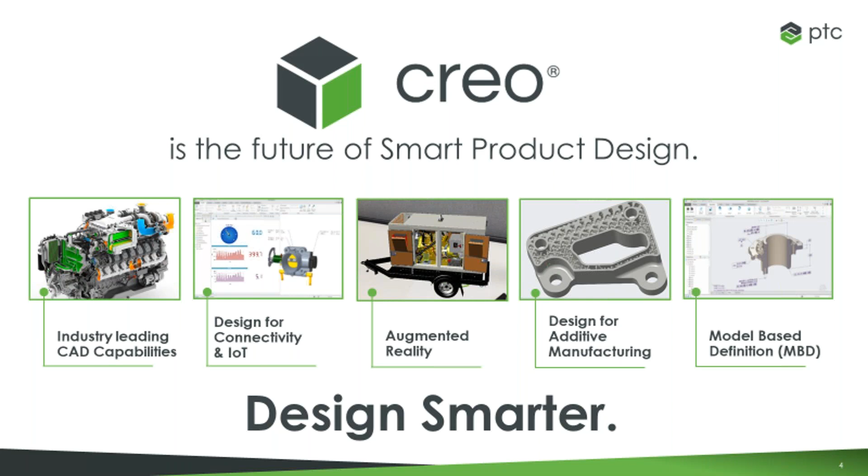In this webinar, we're going to go over a few things and some remarkable capabilities, and we can't wait to show you how it can prospectively help you as we explore more design iterations. So without further ado, let me introduce Eduardo Sorto.

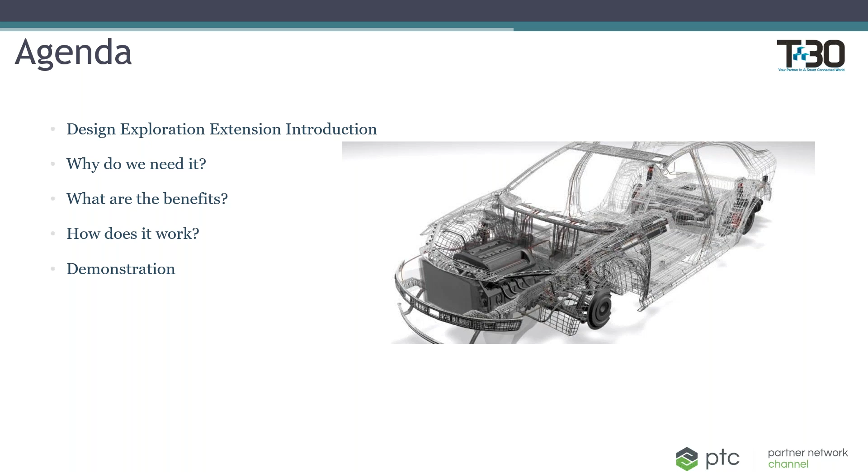The Design Exploration Extension is exactly what it sounds like. It enables you to try out new designs and explore different design alternatives. This is crucial early in the design phase when you're not exactly sure what the end product will be, but you know what your requirements are. From those requirements, there are a lot of different variables you can work with, so having an environment to test out those variables is crucial early on.

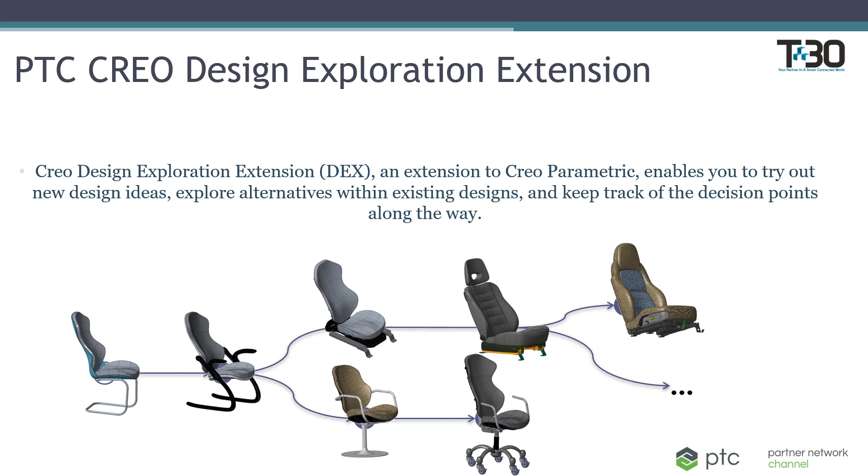The reason we're having this conversation today is because the Design Exploration Extension is now offered as part of the base subscription package. So if you've recently found yourself upgrading to a subscription license, you'll come to see that you have the Design Exploration Extension already embedded, and you can learn here how you can use it. Or if you're considering moving to a subscription model, hopefully you can find some value within this demonstration.

So why do we need, or why would we use, the Design Exploration Extension? As engineers, we know that design is an evolutionary process. There's an end goal we want to get to with the requirements, so we need to test out how components are going to fit together, what are the interferences, what's the market asking for. We need to test out not only the aesthetics of your product, but also the functionality.

This last point says that engineers don't have a blueprint to follow, so we need to test out these different design paths. Being able to use an environment that enables you to do this is crucial for your end result.

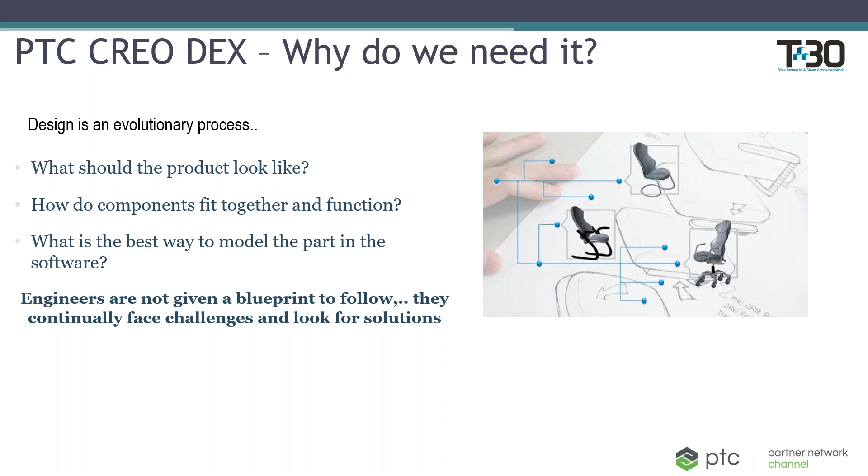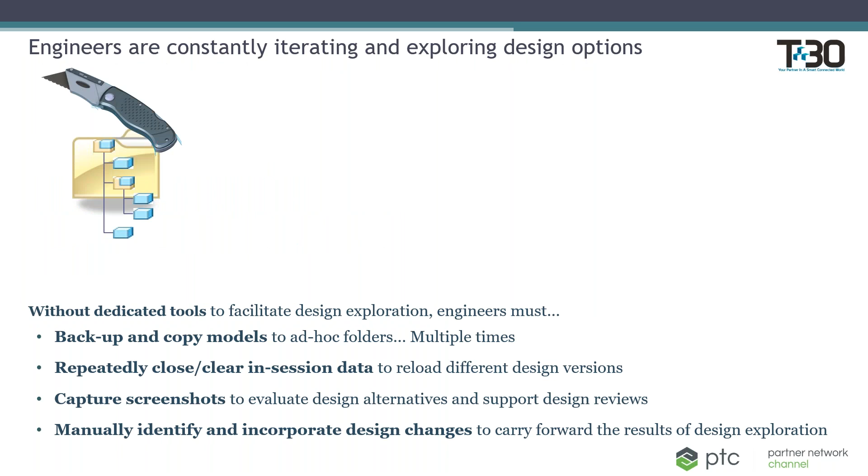Now moving on to the next slide, we've got different design iterating options. How is it usually done? How do you usually come up with different design iterations in your process? Well, typically what I see is people doing a save-as of their previous model or a similar model, and they go ahead and make different design iterations of those models.

As we go ahead and do a save-as, we change the features, and we now have a large set of data with all these large assemblies that we have to manage. So usually I see people do save-as, copy, change the models, and then have a large set of data that they later refer to. Being able to address this issue of having multiple files, and of having to clear your session all the time, and being able to manage all those different design iterations, is crucial.

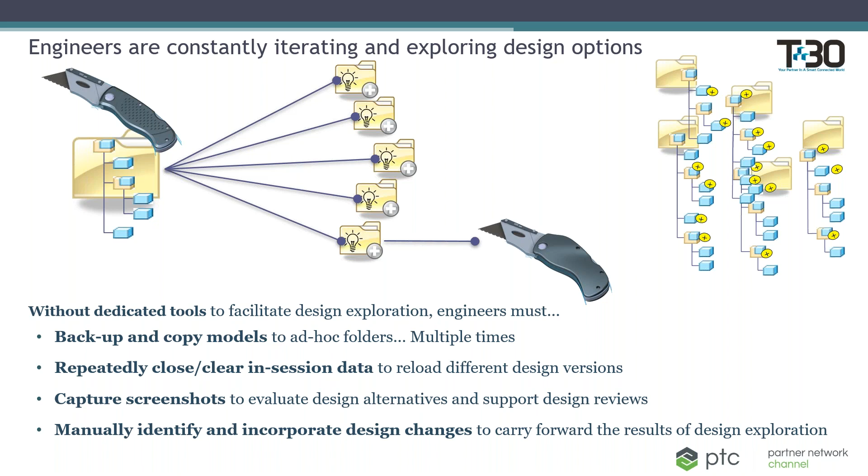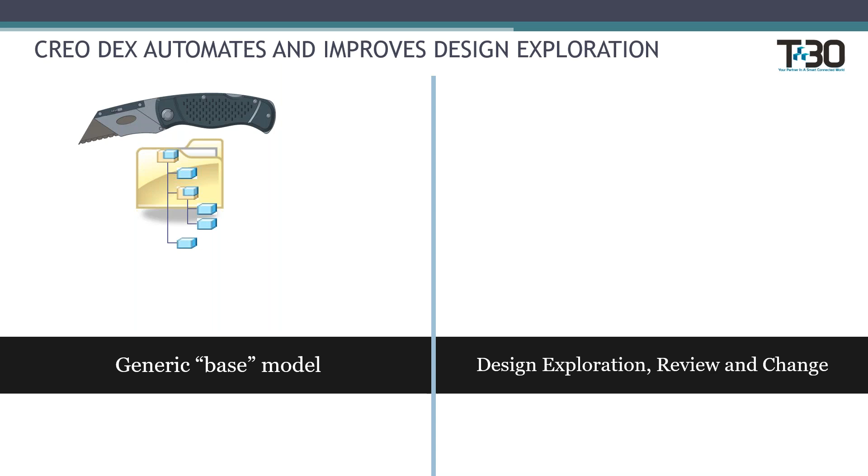That's where the Design Exploration Extension comes in. You start with a generic base model, and this can be maybe the product that you sold last year, that you developed for last year's iteration. So what you want is to be able to reuse this and leverage the hard work you already put into this model, and be able to explore different design iterations.

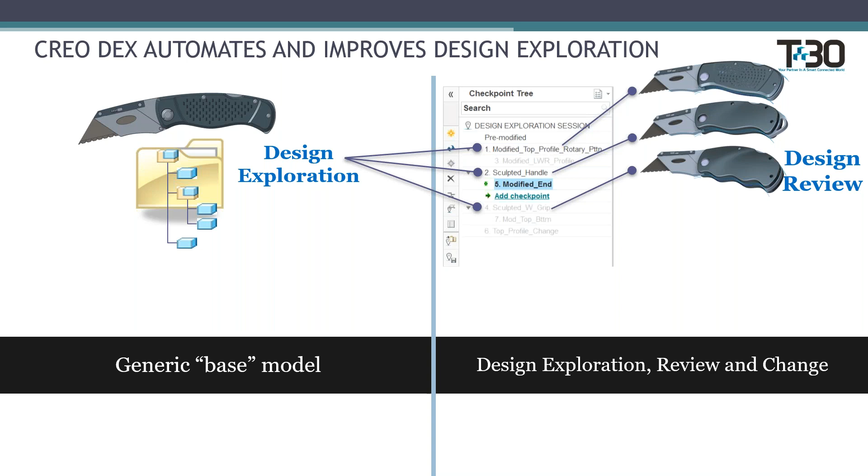So now you can bring this to your design reviews as opposed to having to toggle back and forth between different windows, clearing your session, or maybe even taking screenshots. Now everything's embedded within Creo, you don't have to worry about that.

As you can see, the design process is an evolutionary process, so there's always going to be design changes. You don't want to risk having your model tree unable to regenerate with a change of a feature. So you want to be protected in a sense, and having the design exploration environment allows you to do so. Whenever you're ready, you can accept those changes, or you can even back up to previous design iterations. Now let me go ahead and show you what this looks like within Creo.

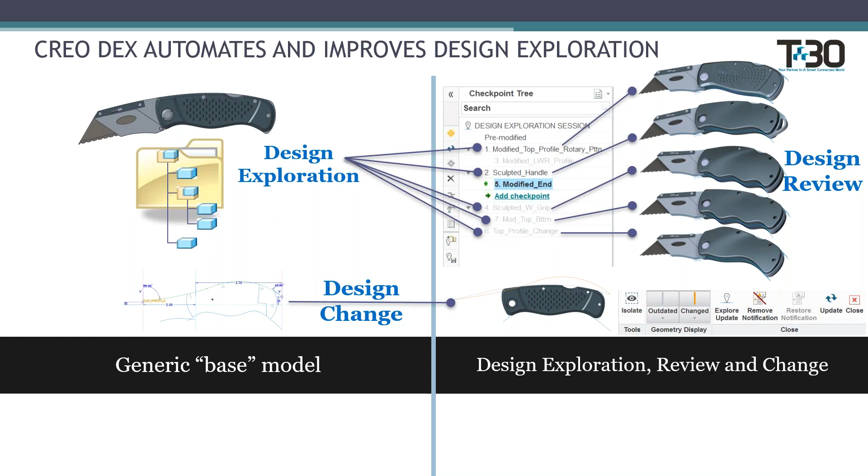I'll go ahead and navigate, and for this demonstration I'm using Creo Parametric 5.0. You can find this environment pretty much anywhere. The first thing I'll do is work with an assembly of a guitar.

We don't know exactly how this guitar is going to look, but we have a model of a previous version that we want to test out or build upon. I'll navigate to my folder and get the top level assembly. As you can see, I already have maybe the previous design of this guitar, so what we want to do is build upon this.

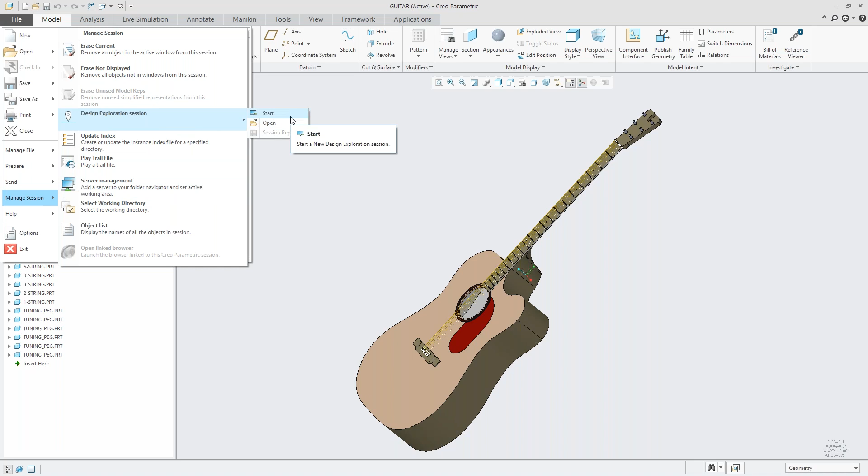The first thing we want to do is enter into the design exploration session. To do this, we'll manage our session and click on design exploration session. We can either start a brand new session or open a previous one. For this example, let's start a new one and call it guitar 2019. We can add a couple of descriptions here. This opens a window embedded within your CAD environment, so you can toggle back and forth and check your checkpoints as you go along.

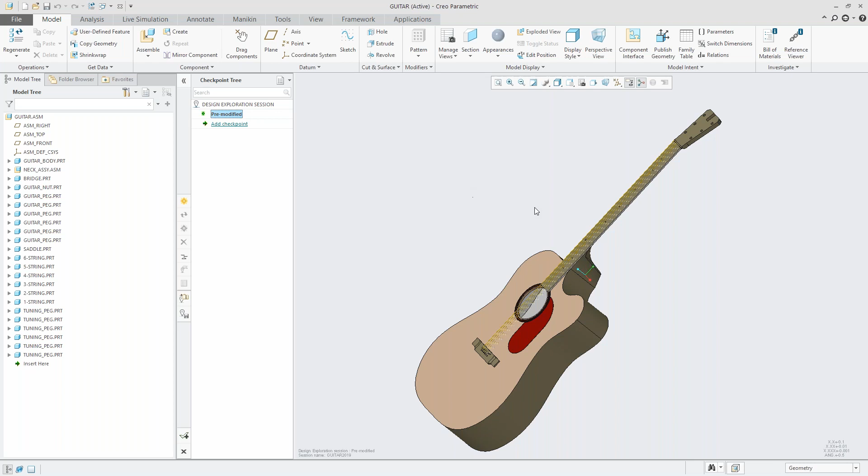The first thing you see is a pre-modified checkpoint, which is basically what you see on the screen. From here, you can go ahead and make your design changes without worrying about ruining the original model. Let's say we want to go ahead and remove this extrude cut for this 2019 version.

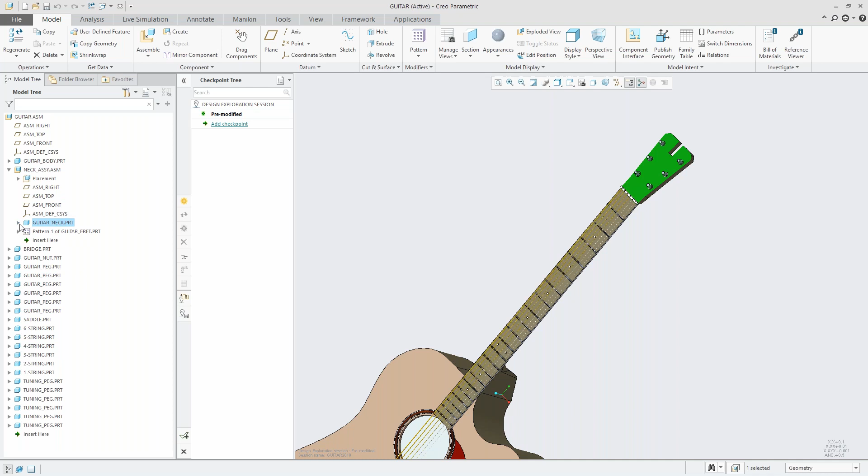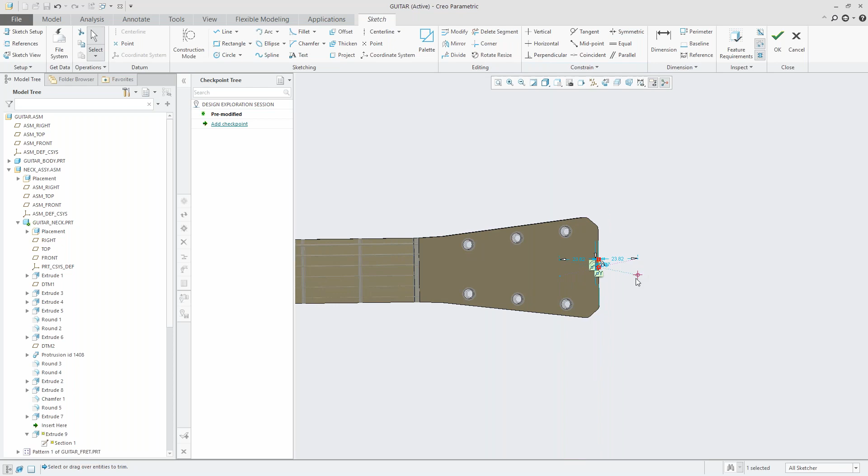So what we can do is click on this, and because we're in assembly mode, we'll want to activate this component here, and go to the cutout. We can either modify this cutout, or modify the section and say maybe we don't want this. Maybe we want something a little bit more round, so we'll go ahead and delete all this and make this cut.

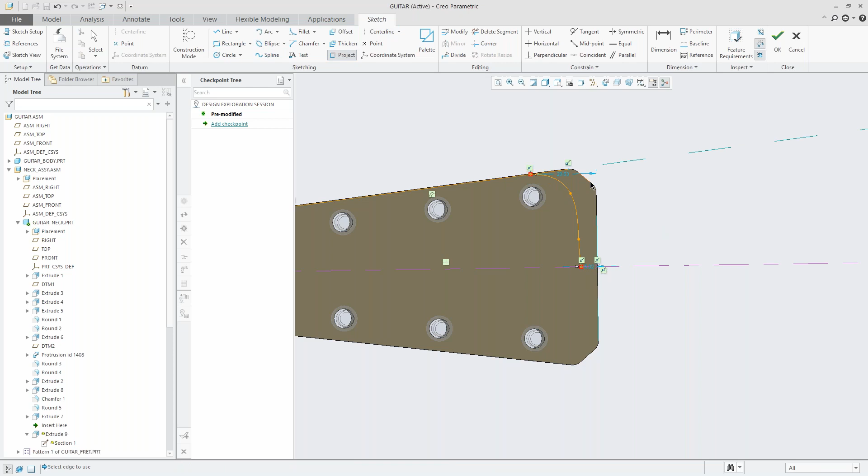I'll just grab this, and maybe something like this is fine for the first one, so I'll make that an extrude. Lastly, I'll mirror this along the center line.

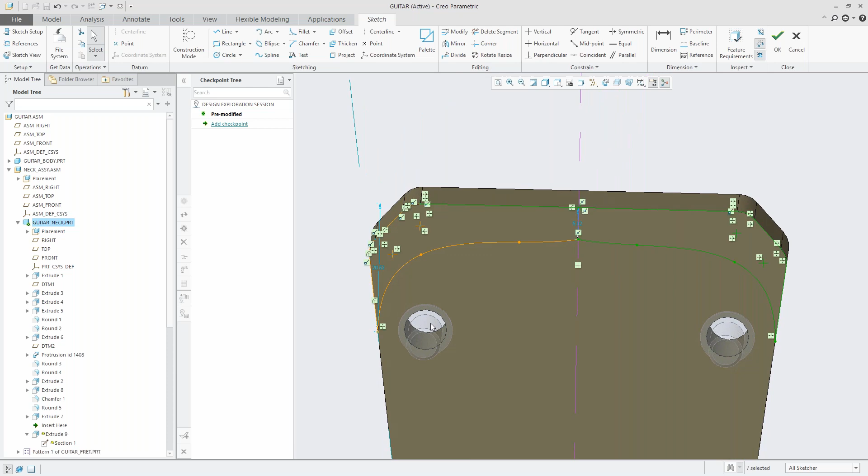As you can see, I'm already working within the same environment here. All I've got to do is save this, and it'll be able to regenerate.

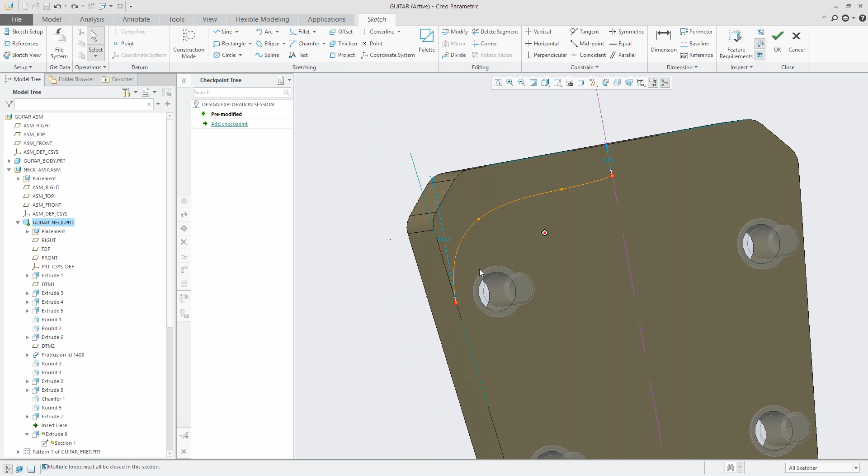Let me go back one. Looks like I'm missing a reference somewhere. Let me just go here and do something as easy as this. We're just doing this for the purpose of showing what you can do.

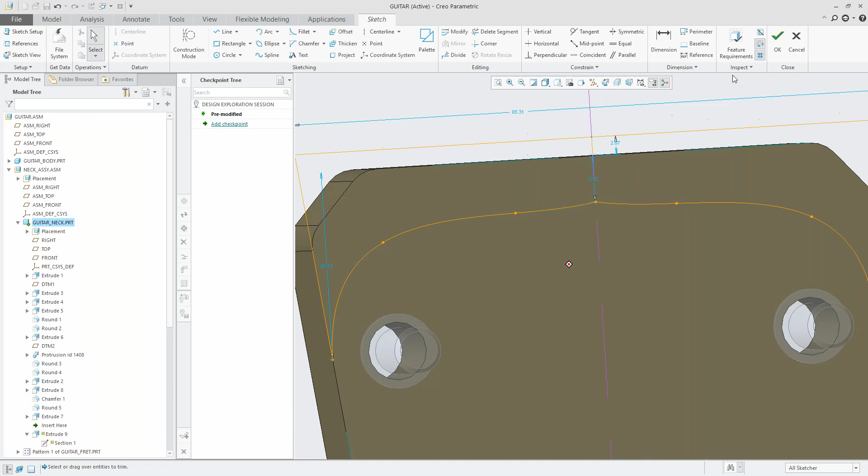We'll remove this middle piece here to be able to get that full area. Let me go back a couple of steps and modify this. Something like this, doesn't have to be too fancy. We'll project this onto the other sides.

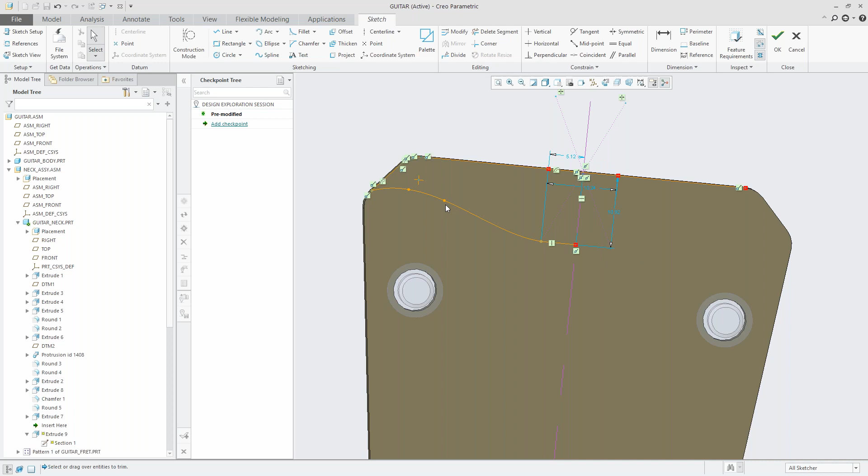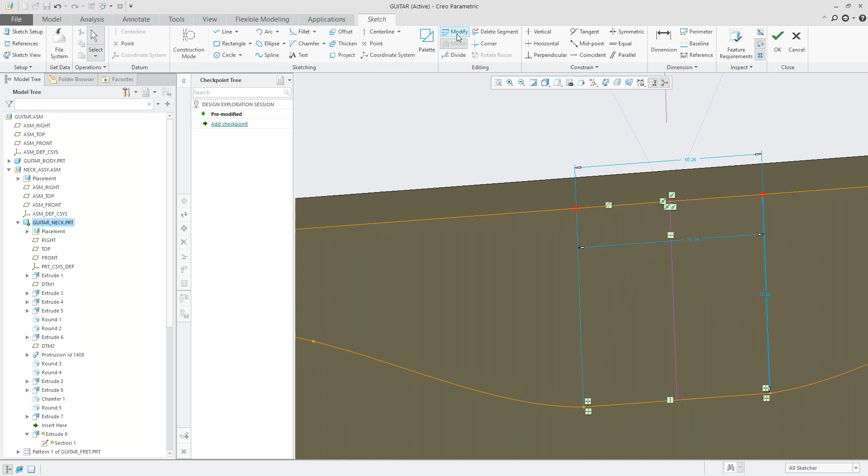Let's go ahead and create a mirror, and mirror this across. Well, that's strange, looks like there it is. That's the one. Alright, last point here.

Well, that took a while, but as you can see, we have a different design already. From here, we can create a checkpoint from the neck of the guitar and call this maybe neck curve.

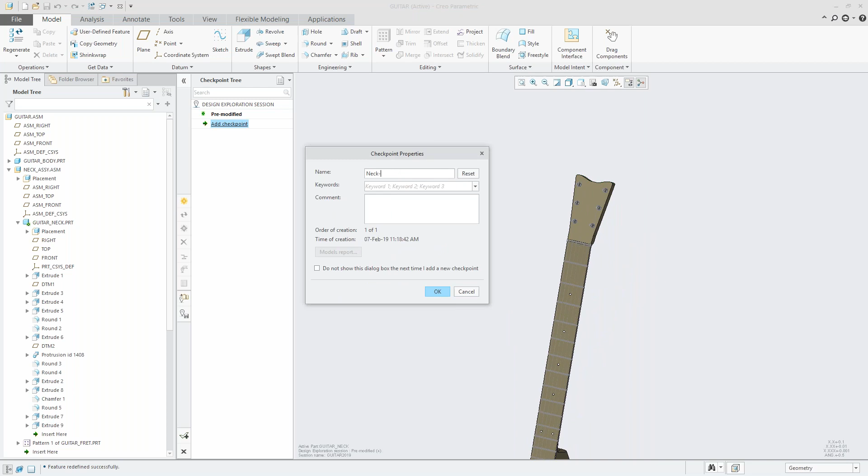So now we went ahead and changed this, activate the top model again, and say we want to go back to what it was before the neck curve. We can right click here and activate this, and toggle back and forth between those different design changes. Maybe we want to work from here and do something else, something different here.

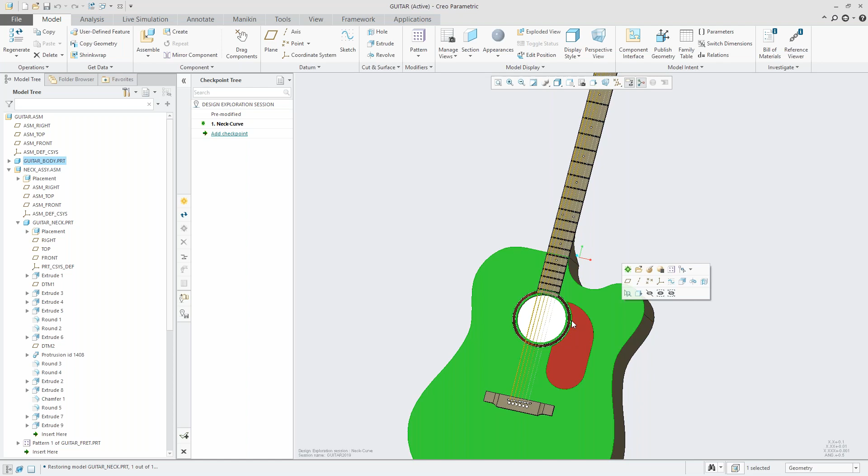Maybe we want to remove this cutout and have a design where it just curves around here. So we'll click on the guitar body, move to our extrude, and remove this extrude cut here. As you can see, we can go ahead and create another checkpoint from there, but let me just fix this bump here for the first extrude.

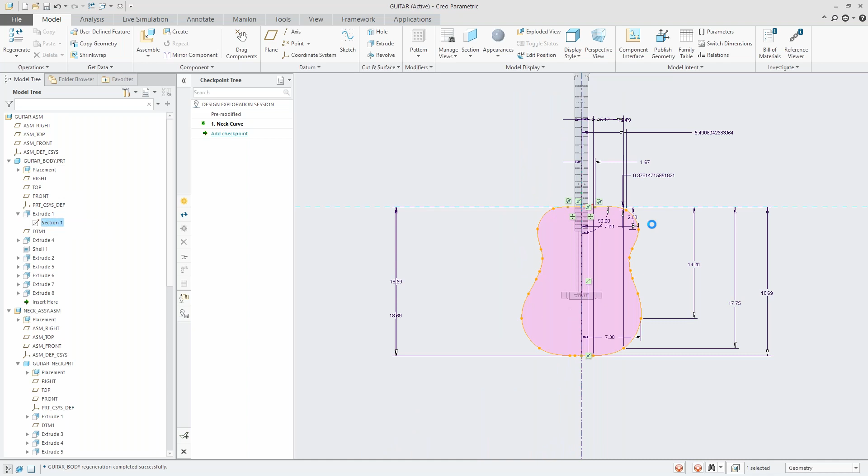I can just bring this in a little bit closer, and bring in this line a little bit closer. Now we have a different design that we want to go ahead and explore, so we create another checkpoint and say maybe this guitar body is now full.

Okay, so now let's go ahead and toggle back and forth.

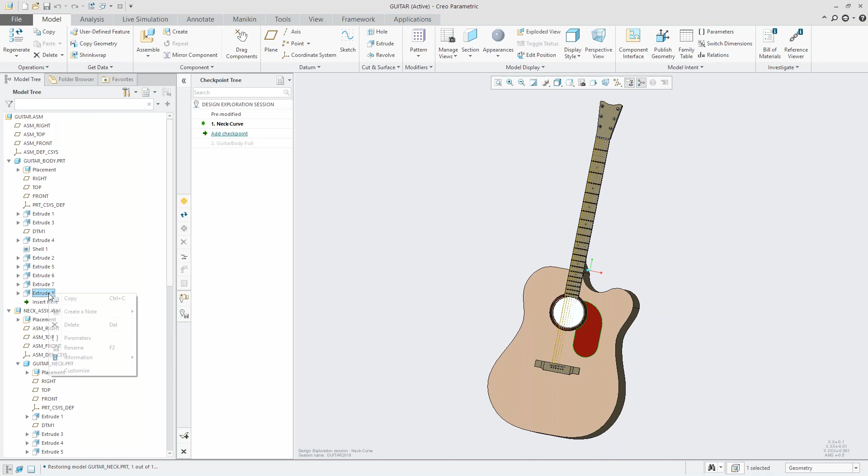Check our pre-modified, go to our full, and maybe we want another option where we use this version but now without the pick guard. So what we can do is just remove this here, and now save a checkpoint from that neck curve to that pick guard.

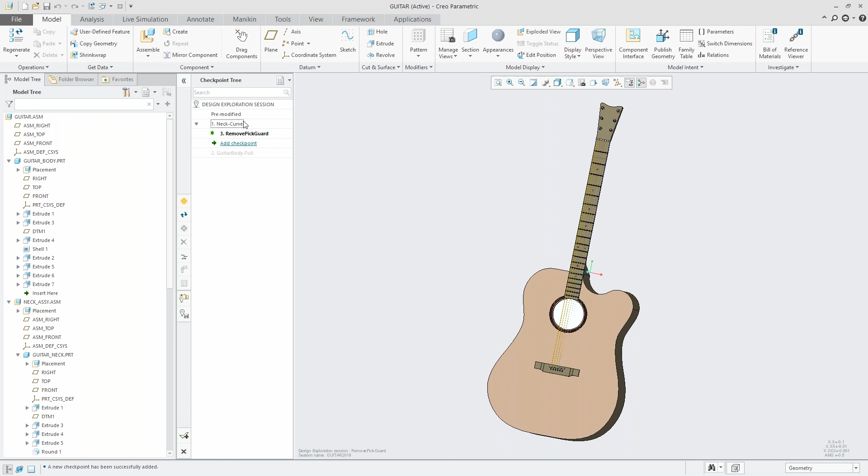Remove pick guard. We can go ahead and add a couple keywords, comments, so if we ever want to do a quick search or query, we can have some easy to find words. Let's say we have a design review session and present all these different iterations. You can go into your design review and toggle back and forth between those, take measurements. You have all the tools within Creo, but now instead of being within PowerPoint showing screenshots, you can just toggle back and forth here.

So say maybe the whole team likes this design, they like the full body, they want to keep the pick guard, and they want to check this, change that neck there. So once you're finished with your design process, or at least these initial iterations, the Design Exploration Extension allows you to accept those changes and enter them into your current session.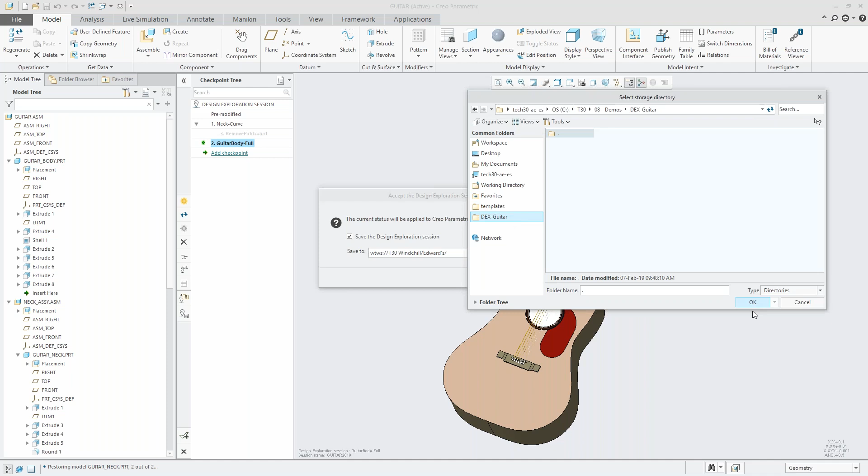This saves it to your guitar.assembly file. So we'll go ahead and save this. You can save it to your Windchill environment, or a different place. Here I have my working directory, so I'll save it there. So now, as you can see, I'm done with the design exploration session. I still have my top level assembly, and it still has the same file name, but now those design changes are saved within this file.

So we don't have to manage all those different save-as options for the pick guard being removed, for this change of body. It's all stored within one file. And the design exploration session is stored within its own file itself. So I'm going to open up the File Explorer here, and navigate to where I saved that design exploration session. The extension for that is .tmu.

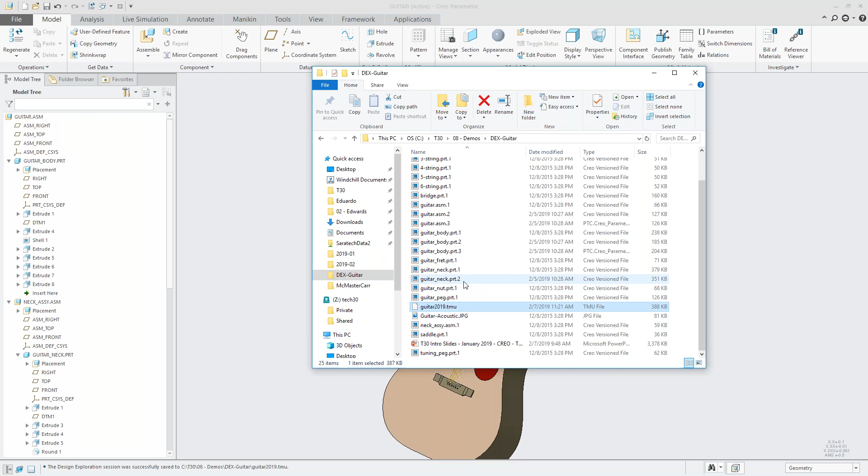So if we ever want to go back and explore those different design iterations, we can just open up this exploration session and toggle back to our previous design or even build upon what we have here. Okay, so let's take a look at that. The first thing we'll do is just clear our session here. And from there, we can go ahead and open a design exploration session.

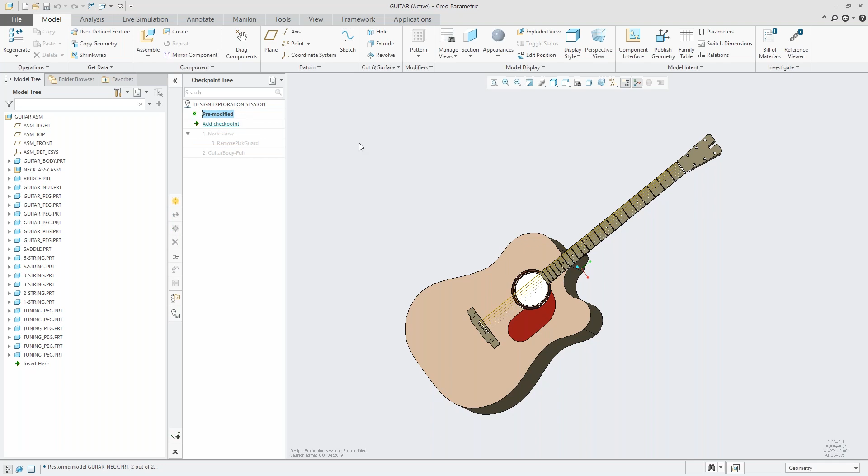Okay, so let's go to our directory here, and we can go ahead and accept this. As you can see, we're back at this checkpoint tree, and we can at any time move back into our previous designs. So we don't risk damaging this pre-modified model of 2018. We can now just build upon that, and we don't have to worry about 1, 2, 3, 4 different file assemblies. It's all within one environment.

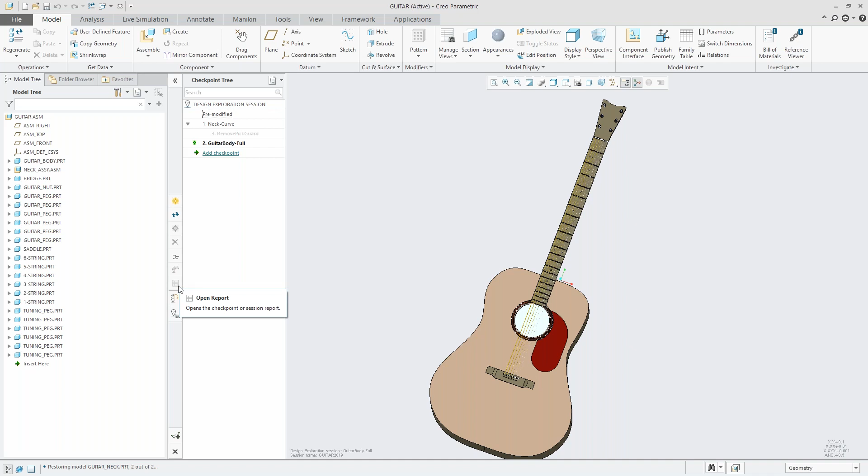Okay, there are a couple options here on the left too. You can delete your checkpoints, activate them to work within them, update them at any point if there are changes, change your keywords to search, and you can even do a report from this. So your report would have anything that's changed. You can go ahead and create, let's activate this, and we can take a look at what was changed from that report.

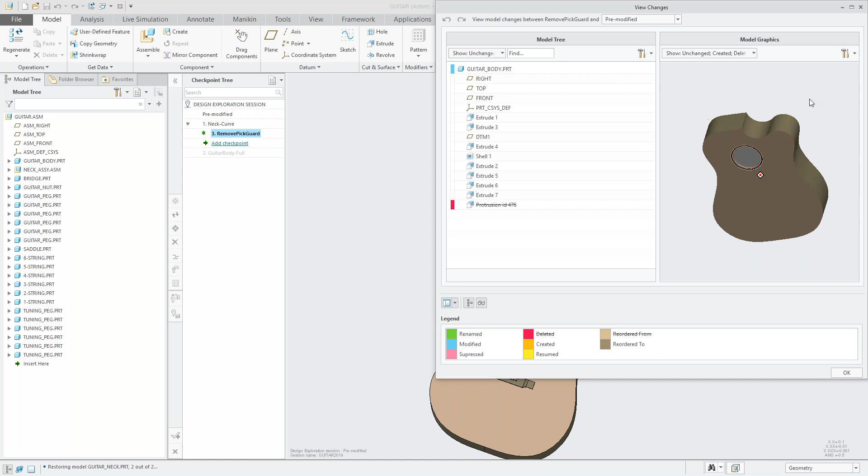All right, so this will toggle up. It'll tell you what are the modifications, what are the checkpoints. You can view your changes from those. So here it'll give you a clear dialog box of what was removed, what was deleted. You can go ahead and change some of this too, so you can have this as part of your design review too. So if there's anything that's not apparent that was changed, you can use this tool to help you communicate those design changes.

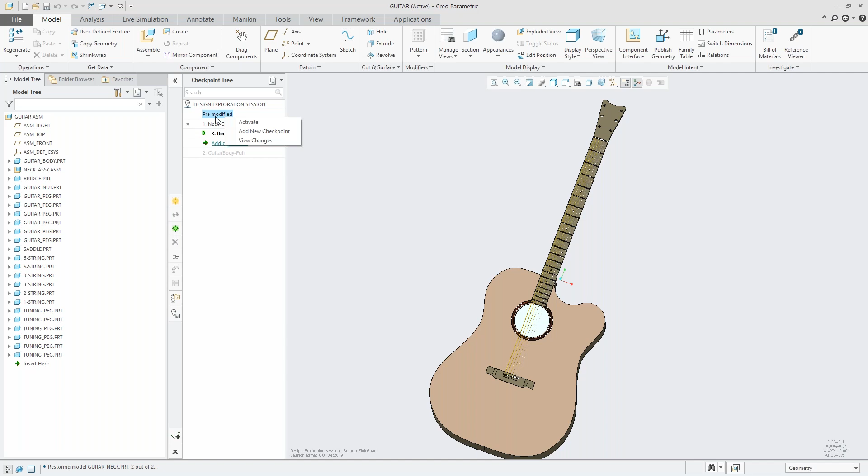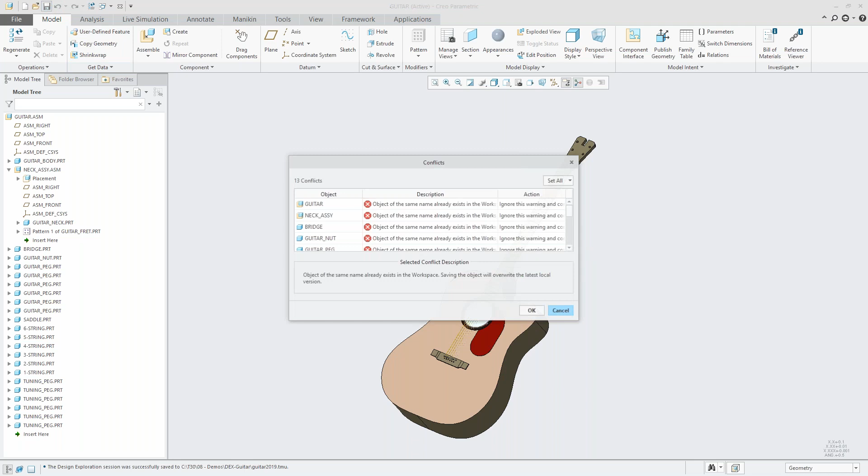Okay, so now let's say we have to go back to our 2018 guitar model because maybe we had some manufacturing restrictions that we didn't take into account. So let's go back to our pre-modified model, and let's go back and accept these changes. Okay, so now our guitar assembly, same file name, has the pre-modified designs.

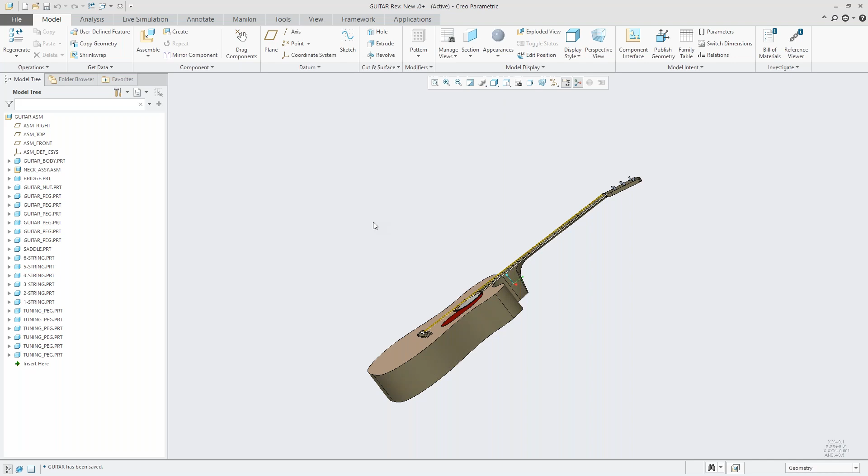So we don't have to worry about where we're going to store it. It's all captivated within one file type, and if we ever want to go back and explore different designs, we would use the .tmu file extension here. Okay, so now let me toggle back to the PowerPoint to illustrate the main points, main takeaways from here.

Okay, so really the design exploration extension has 3 real impacts to your process. First, it allows you to explore different designs early in the design process, so there's no risk of damaging that original file, and you don't have to worry about file management. And it enables you to have a more fluent design review. You can toggle back and forth, accept, add some metadata to what your specific design iteration had, and some keywords, and then push out design reports for those review sessions.

And then lastly here, you can safely explore the impact of those design changes. So I mentioned that for this scenario, the 2019 changes we wanted to do did not align with our manufacturing capability. Now there's no risk to damaging those design changes. It's all managed within the exploration session.

And below here are a couple statistics. PTC surveyed 7,000 manufacturing organizations, and as you can see, there's a lot of benefits to having an environment where you can explore different design paths.

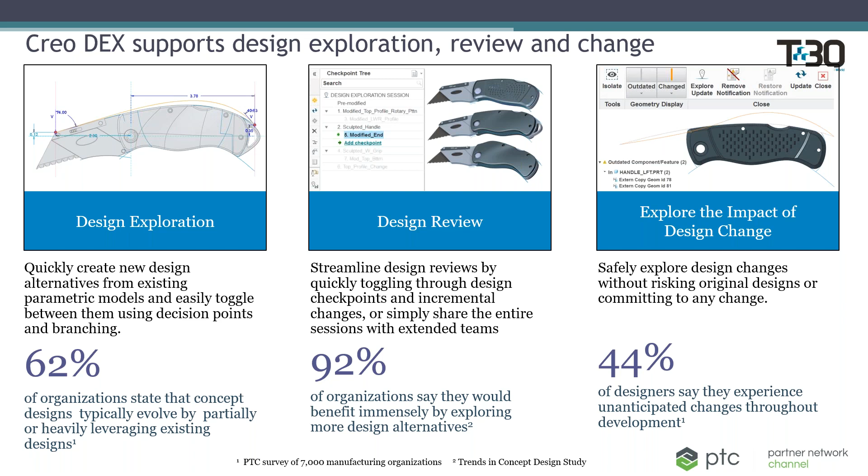So that's all I have for today. I hope you learned that this extension may provide some value, especially early in the design phase. And I'll just open up for questions.

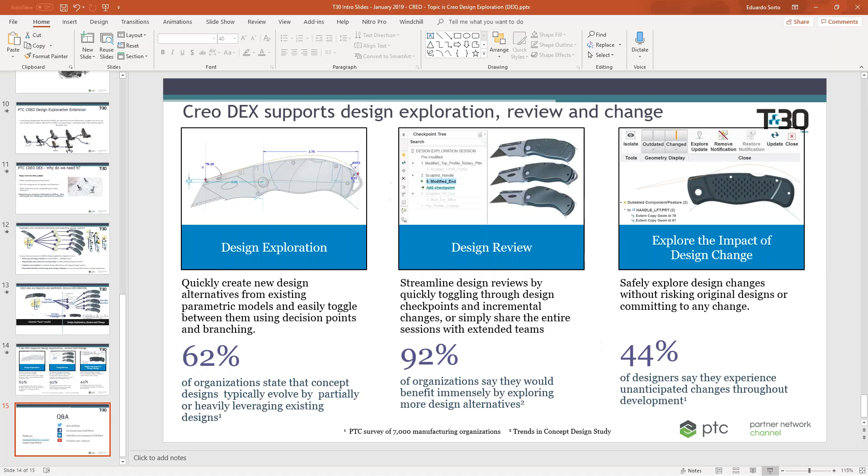That's a good question. So the design exploration session saves as its own file name or file type, and that's the .tmu file that we saw. Let me just show this real quick. So this is the .tmu file, and as you can see, it has 388 kilobytes as opposed to the guitar assembly that has 66. So all your design checkpoints are saved within this file. So you don't clutter your working environment or your working directory - you just have it all saved and stored within this .tmu file.

Thank you. We also have a question from Derek Mitchell - after you've accepted a checkpoint, are you able to revert to the original model? That's a great question, and yes, you are able to revert back. Once you accept your changes, you're not held committed to those changes - you can always go back. So you would open up your design exploration extension or your session, and it's all stored within that .tmu file. So you can go ahead to your pre-modified checkpoint, accept those changes, and there's no risk whatsoever.